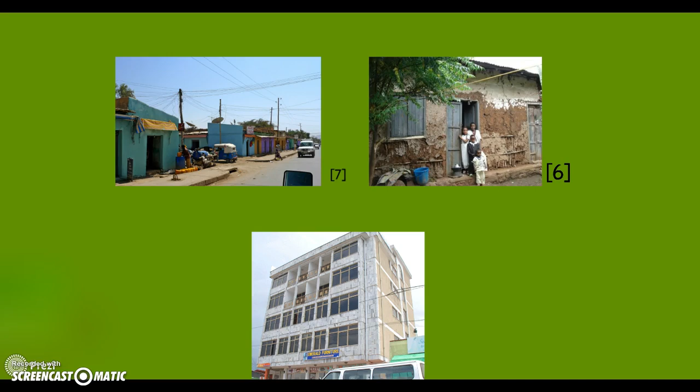Some of the apartments would do better with the sealant because the roof is flat, so they don't need the angled roof, whereas some of the other houses that have the angled roof would be better for clay tiling.

In the deserts of Ethiopia, many homes and people live without air conditioning, and if they do have it, it is very expensive. Implementing cool roofs in houses and apartments will be more energy efficient, cheaper, and comfortable for the locals. Cool roofs reflect light, absorbing less heat, making buildings much cooler despite the constant glaring sun.

A normal roof can get up to about 150 degrees Fahrenheit, while a cool roof can get about 50 degrees Fahrenheit less. This allows the inside to be much cooler and much more comfortable for the occupants.

Not only do cool roofs help cool the inside of buildings, but they can also help the surrounding environment. They reduce local temperatures as less heat radiates off the roof of the buildings. Cool roofs will provide more comfort to a struggling community.

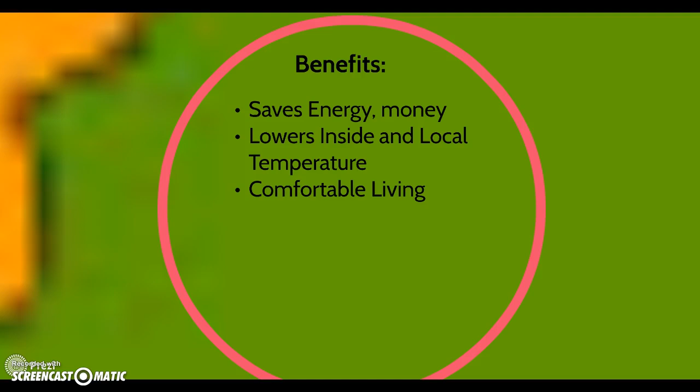Ethics are very important to consider when beginning a construction project, especially in other countries. Much like America, Ethiopia has building codes which civil and construction engineers must abide by. These codes outline any ethical and safety regulations the government requires.

Some aspects of ethics in building construction include where the materials will come from and how the construction team acquired them. For our project, we will need to acquire steel, concrete, clay, and specific roof sealer.

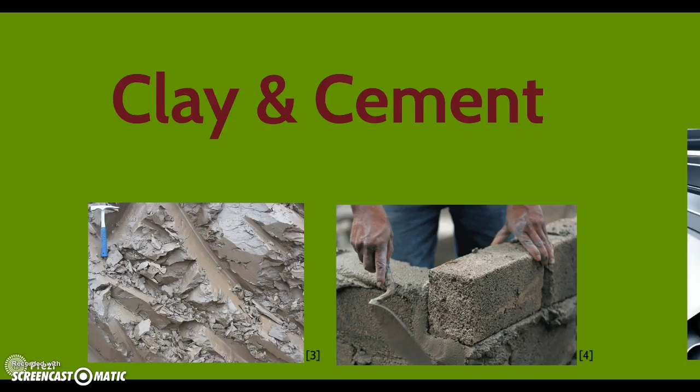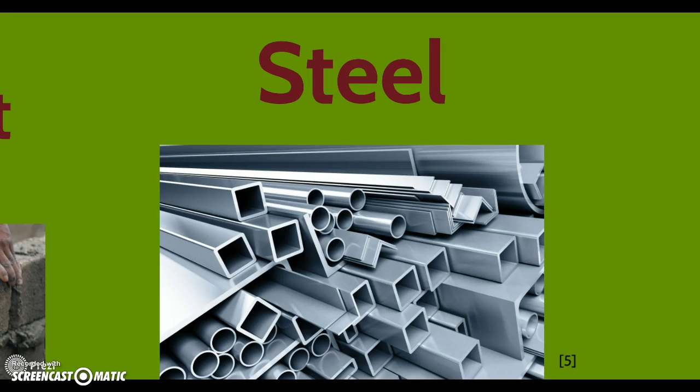Since Ethiopia has a clay and cement market, it will be easy to obtain cement and clay from this country. Concerning steel, Egypt is a neighboring country to Ethiopia with a very strong steel industry, so the construction team can acquire steel from there. Roof sealer can be easily acquired from the United States or Europe.

Another factor of ethical construction involves doing what is right by the country and for the people. Some construction may tear down citizens' houses and take over whole neighborhoods. However, our construction project will only refurbish citizens' houses and provide better living conditions.

In addition, Ethiopia is in the middle of a housing market boom. Even though this boom is great for the economy, some believe it is just to cover up poverty in the city. Keeping this in mind, we will be restoring original houses, not building new ones.

This will lead to nicer homes for the poor and middle class, and we hope to be welcomed into Ethiopia's construction industry with the promise that we will continue to influence the housing boom in a positive manner.

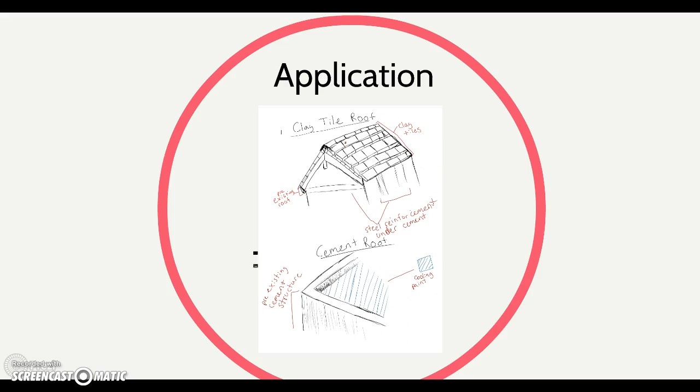In this project, existing structures in Ethiopia are equipped with cool roofs. Residential buildings with sloped roofs, such as the one seen here, will have clay tiles to enable natural cooling. Ethiopia has many clay deposits, allowing the materials needed for this project to be acquired quickly and cheaply.

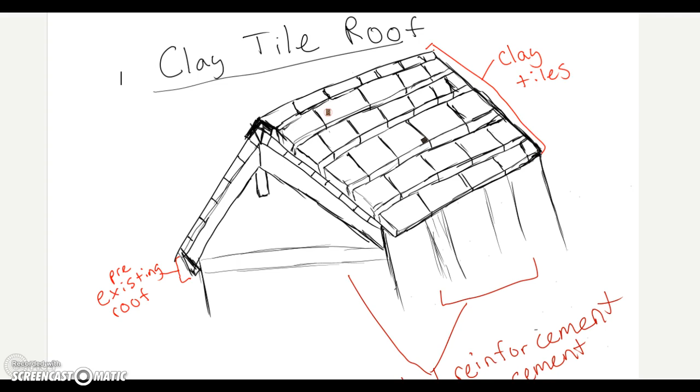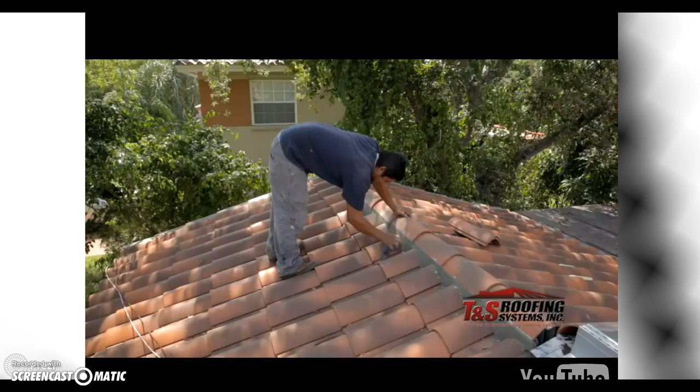Here is an instance where clay roofs are applied to a building in Miami, Florida, but this is the same process that will occur in Ethiopia.

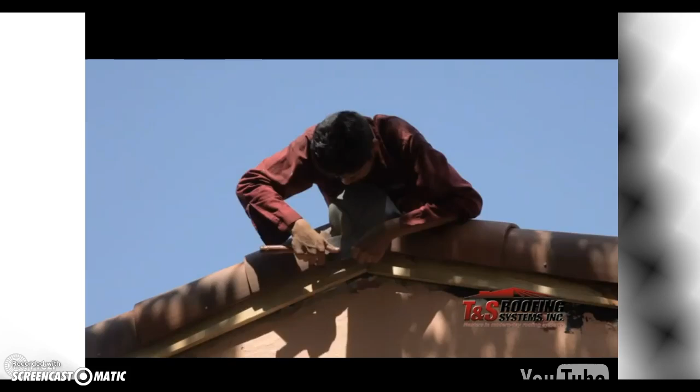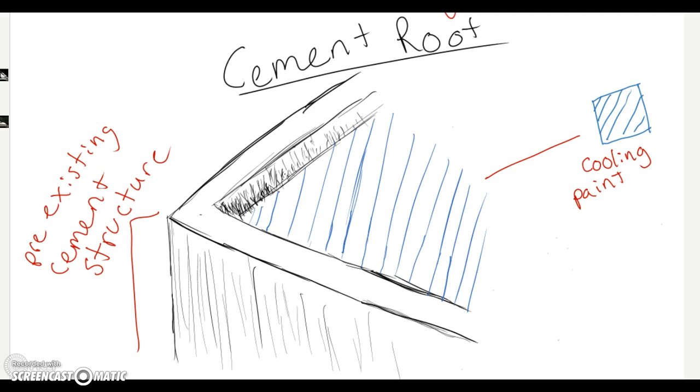In some instances, roofs such as that of a school are made of concrete. With concrete roofs, only cool roof paint is needed to improve the building's temperature because the roof is flat. Here is a video of the application of paint to a roof, such as will be done in Ethiopia.

Implementing cool roof systems into Ethiopia has many costs, including the several materials needed. We decided to add paint or special tiles to existing concrete houses. A single 5-gallon tub of paint would be about $100.

A few houses would require $500 to $1,000 in paint alone. As for the tiles, because they can be made locally, they are inexpensive. Each 50 cm by 25 cm tile costs 4 birr, which equates to about 19 cents per tile. A 30 square meter roof, the average, would require 240 tiles, so the total cost for the tiles would be just under $50 per house.

The big costs would be the steel reinforcements and concrete needed to keep the clay tile roofs up. A metric ton of steel is about $800 to $900, but there should be extra steel left over for the next house. Concrete would cost about $100. All of these costs add up to about $1,200 for one house.

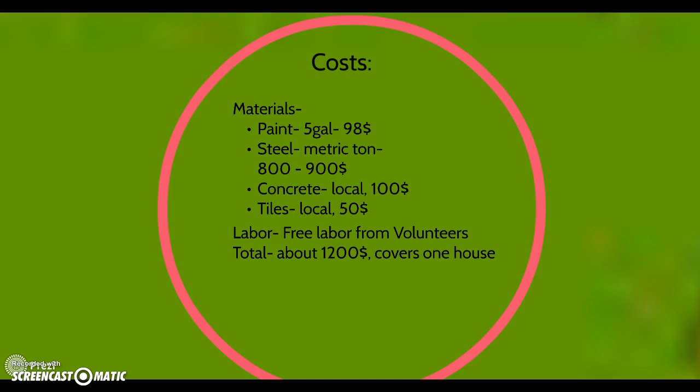A major aspect of scheduling is when we can get workers there to perform the improvements on the houses. We could fly over volunteer workers from the United States, but this would be very restrictive on the schedule because they would not necessarily always be available. This is also restrictive because flights can get canceled, and they may not run when we need them to.

We could also try to get volunteers to come in from the local community. Alternatively, we could pay workers from the local community to come in and work on the houses, but this would not be cost effective. Therefore, we concluded that we should try to get volunteers to come in from the local community.

Additionally, for scheduling, concrete takes about 4 hours to set at a temperature of 80 degrees, which is typical for Ethiopia. This means that the reinforcements would take about 1 day to install, and then they could dry overnight. The crews would then return the next day to place the clay tiles on the roof. In all, the process would take about 2 days for the sloped roof houses.

However, this process is very temperamental because the concrete pouring would need to be carefully planned well in advance, since weather has a huge impact on the pourability of concrete. You cannot pour concrete when it rains or if it is too hot or cold.

However, the case of the flat roof with the paint is much simpler. The installment of the cool roof would only take 1 day because all that needs to be done is painting the roof. In summary, the NGO should invest in our project because it is cost-effective, easy to implement, and most importantly, highly needed.